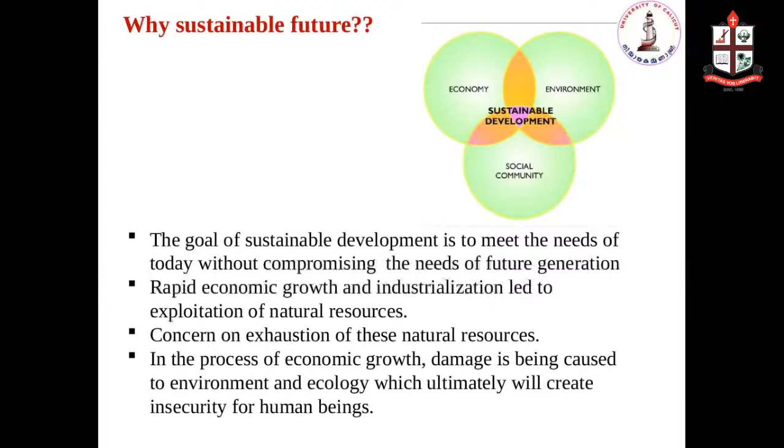Clean energy materials for sustainable future. Why? Because now everyone is thinking about very good quality materials and also energy. What we are using should be very clean and environment friendly. You know that the development of any country and any society mainly depends upon what type of energy materials they are using, how they utilize that energy, how these energies are produced, and whether it is clean and good for the society and environment.

At the same time, pollution-free energy production is very much important to keep our earth clean, and that is the main thing everyone is discussing now, because after the Kyoto Protocol, people are thinking about how to use clean energy and how to make our future very green and clean.

So why sustainable future? You know that economy, environment, and social community are the three pillars of development. For sustainable development, these should move hand in hand. The goal of sustainable development is to meet the needs of today without compromising the needs of future generations. This is very fundamental, because not only physics people, chemistry people or environmentalists, this is now the aim of all researchers working in the field of energy as well as technology. We know that rapid economic growth and industrialization lead to the exploitation of natural resources.

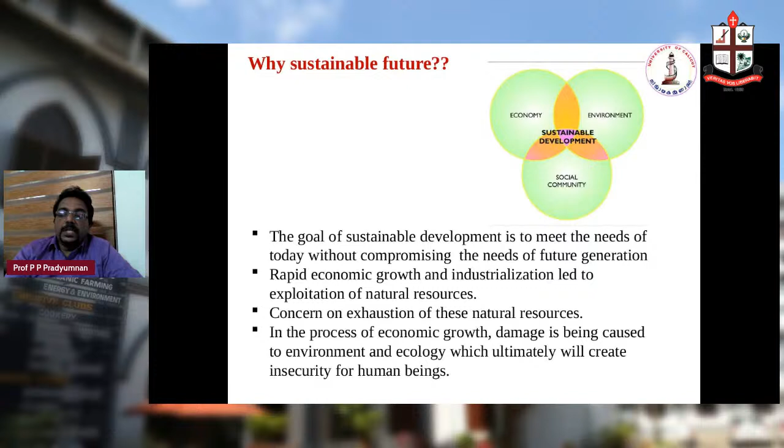This is the main thing people are now discussing: how to reduce fossil fuel usage, how to reduce the digging of oil, and whether we can use other things to meet our energy needs. As I already discussed, development mainly depends on the energy consumption of a country, how much energy per year and per head a country is using. Based on that we can calculate the growth rate of that country.

So when we look into our country, what type of consumption is there? Petroleum, natural gas, coal, electricity, non-conventional. India is still using about 48 percent of energy mainly from coal. We have very good coal quarries in the northeast and northern part of India, so we are getting enough coal. Natural gas we are getting in some areas, nearly 7 percent we are utilizing.

The next 26 percent is mainly based on petroleum and petroleum products, mainly automobiles as well as certain diesel power plants. Then natural gas, coal, then pure electricity, mainly hydrothermal electricity. And non-conventional is about 14 percent now in India, according to the 2020 survey report.

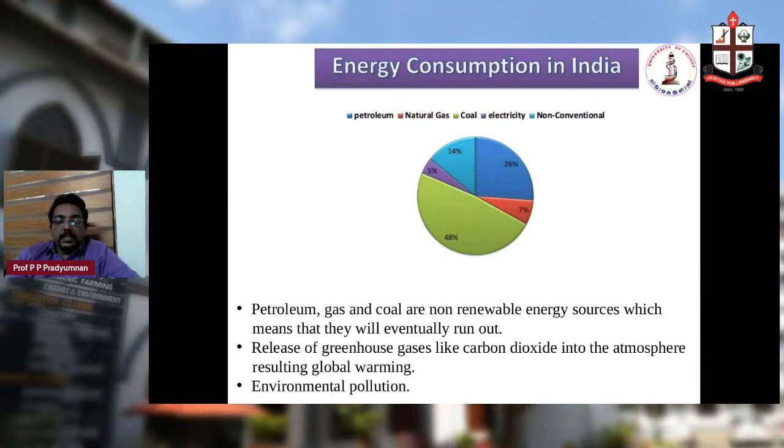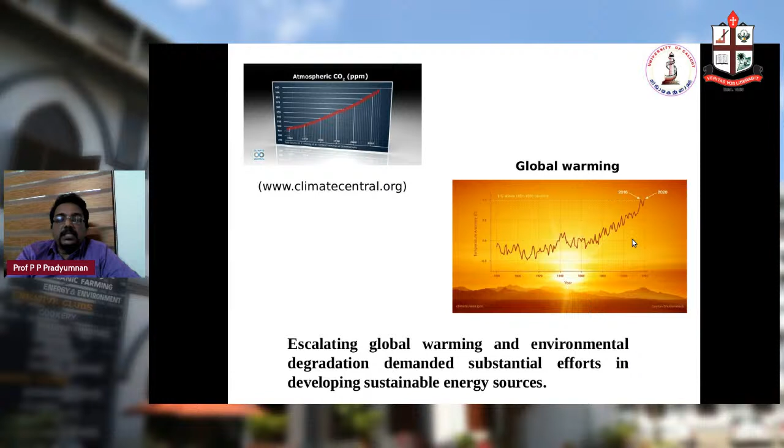Okay. So what are the energy sources we can utilize for the development of a country and for our utility? So we know that there are many conventional methods, non-conventional methods, or non-renewable energy and renewable energy classification. So in this non-renewable energy, we already discussed oil, coal, nuclear and natural gas. These are the non-renewable class of energy production.

At the same time, renewable energy, there are many, but we know that an enormous amount of heat energy is liberating from industries, automobile engines, and many other places. And even on very sunny days, we are getting enough heat energy. But all these energies are wasted because we are not utilizing them for our purpose. Of course, we are using sunlight for drying meat and fish, etc. That, in former years and ancient times itself, people were using.

But for the production of energy like electrical energy, we are not utilizing this heat energy, and only a very small amount of sunlight we are using for solar cell applications. And wind energy, because in a country like ours and many European countries, they are getting enough wind energy, because this wind must be at a particular speed, then only we can utilize it for energy applications.

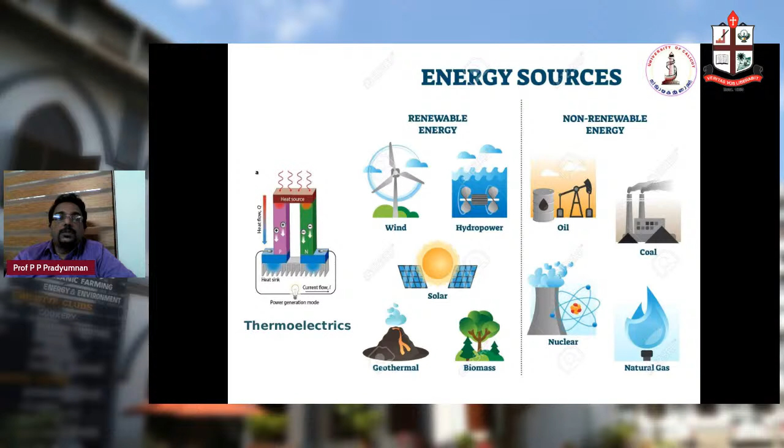Okay. So then geothermal. In some areas we know that very hot water is coming out, very hot springs. So that also we can utilize, because hot water means energy. So that is another method. And of course biomass, because an enormous amount of biomass is available on earth, we can use it for energy production. So these are the main two: renewable and non-renewable energy classes that can be utilized to meet our energy usage.

So why are people now mainly concentrating on solar energy? Because solar energy is the main component we can exploit very easily for our electrical energy applications. So the energy is incredible. One calculation says that 30 days of sunshine striking the earth have an energy equivalent to the total of the planet's fossil fuels, both used and unused. Such an enormous amount of energy we are getting day by day, but most of it is underutilized or unutilized.

The main advantage of using solar energy is that it is distributed over a wide geographical area. And developing regions like ours, India, have access to electricity generation at a stable cost for the long-term future. That is another advantage for us because we have very hilly areas, and in those areas, like the northeast, small solar plants can be utilized. People are doing that now, but with more such plants, we can reduce the usage of fossil fuels.

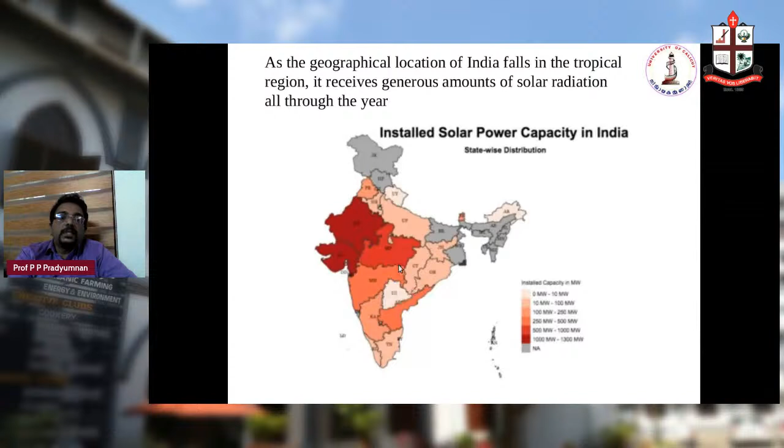Maharashtra also they are doing, but these around 1,000 megawatt to 1,300 megawatt power stations are mainly in Rajasthan and Gujarat, and very low in certain regions like Telangana. They are not at all using the solar plants now also. So we have to do more in that area to reduce the usage of fossil fuels.

So I think this is an interdisciplinary talk, so I am not concentrating much on physics, but anyway, I will give something about what we are doing in our university, some research work, at the end. But here also I am discussing some physics, but not in a deep or research manner.

So you know that solar cells are anywhere, on rooftops or where a solar plant is there. You can see in Kerala, our Nedumbassery airport is completely energized by solar plants. They are saying that the total amount of electricity they are utilizing is from that plant only, and the excess amount they are selling. So what is the main physics I'm discussing here.

You know that a solar cell is mainly now also manufactured using crystalline silicon. Production of crystalline silicon itself is a very big task, and pure silicon is used by doping P and N, because a solar cell is a diode structure material, P-type and N-type semiconductors together. So that is a diode actually.

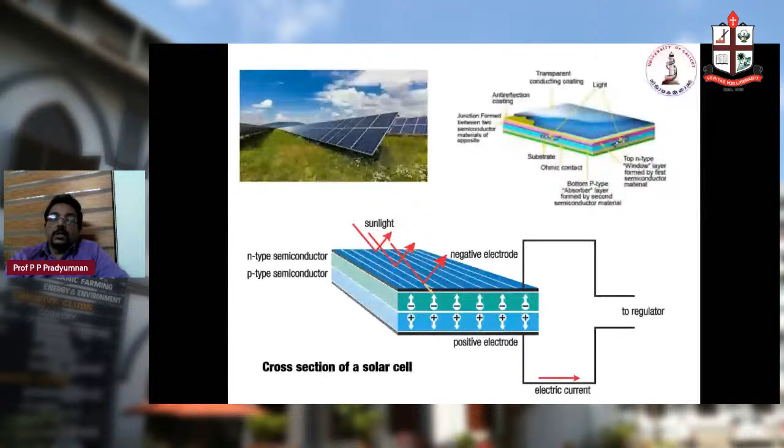When sunlight is incident, of course electrons will pass through. These electrons we can take from the bottom and the top. Then you are getting the electric current, in a simple way, and with that we can charge a battery or another cell, or directly use it for an application. So this type of energy generation we commonly call an eco-friendly method, because here no chemical reaction is happening.

Only physical things are happening, because when photons are incident and have a sufficient amount of energy, only then will these electrons be generated. Otherwise, the material will be heated up. The electrons carry, and that electron flow we are using is actually electricity, current. So initially we discussed only one type of solar cell, that is the silicon solar cell. Even now the main economy of solar cells is from silicon solar cells.

So there is a classification of photovoltaic solar cells, because initially the photovoltaic cell was the monocrystalline solar cell. I already discussed silicon preparation, crystalline silicon, how to grow the crystal, in the 1950s actually. Before that, with the invention of transistors, people needed very pure semiconductors. Then Czochralski came and put forward a method to prepare very pure silicon crystals. His method is named the Czochralski pulling method for fabricating silicon crystals.

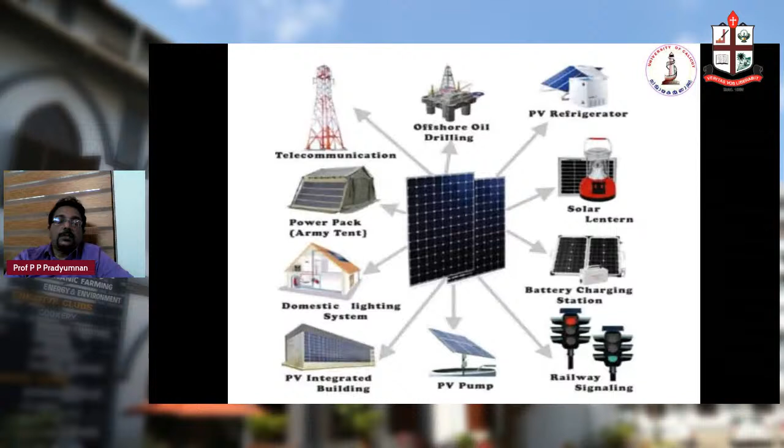For electricity generation, photovoltaic integrated buildings are there in many buildings in China. They already use photovoltaic integrated buildings to reduce the energy crisis. Then domestic lighting systems. In certain houses, while building itself, the roofs are made of solar cells, and in that way they can reduce the energy usage of that house.

Another thing is wind energy. Wind energy we can also call clean energy. But how can we say it relates to materials? Because in wind energy we are using a turbine. When this turbine rotates by wind power, that is mechanical rotation. By using certain gearboxes, we can control or enhance the speed of the turbine or generator, and that is the simple technique used here.

Similar to a hydrothermal project, where we use motors or generators, here turbines are used. The turbine will rotate, and by using proper gearboxes we can reduce or increase the speed. That high speed rotation, when Faraday's law is applied with proper generators, will give you the power output. That power output you can use for applications. That is the thing here.

Wind energy utility is very simple and at the same time very cost effective. In these very huge plants, using wind turbines, kinetic energy of wind is converted to mechanical energy or electrical energy that can be harnessed for practical usage. And it requires less space than average power stations.

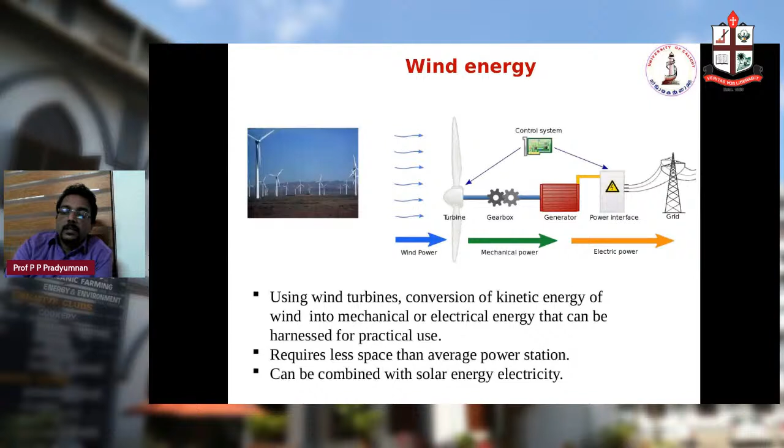And we can combine. Now people are saying that wind energy and solar energy combination we can do in certain regions, because in the night time very good wind flow will be there, and in the daytime very good sunlight is available. So the same region we can use for both. So that type of plants people are now discussing for how to reduce carbon dioxide greenhouse emission.

So another thing for generation of clean energy, of course not a new thing, is batteries. So everyone is now discussing about batteries. Now lithium ion battery, everybody is discussing. So polymer battery. Mainly after the invention of mobiles and laptops, where we need a huge amount of this energy,

mainly storing electrical energy. But before that, we could directly plug in and use electrical energy. But when we want to transport our knowledge from one place to another, the simple technique is mobiles and laptops. So there we need the storage of electricity. That is why very small and thin batteries are required. So it is definitely a transducer which converts chemical energy to electrical energy and vice versa.

But charging and discharging is the main thing when lithium ion is discussed. But now also you know that cars and vehicles, automobiles are run by battery. That is why research in this area is now spending a lot of money on how to increase the capacity of batteries and the life of chargeable batteries.

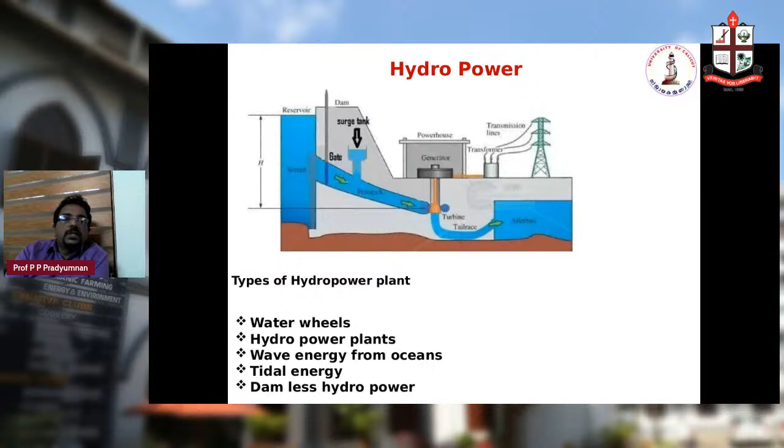Are there along this? We all are associated with water, and tides means tide itself a power, ocean. That is also another method, and there is also some research going on, but it is not 100%. This tidal energy utility is not 100% successful, but in some European countries they are successful in that area. But in India, we are not using it; some power plants we studied, but it is not working now.

Geothermal energy is a type of renewable energy taken from the Earth's core. Geothermal reservoirs can be suspected where we find geysers, boiling mud pots, volcanoes, hot springs, etc., which are giving a good amount of heat energy. That heat energy we can use for heating water, and that water we are using for tapping energy or generating power by using that steam. Water means here hot water turns to steam.

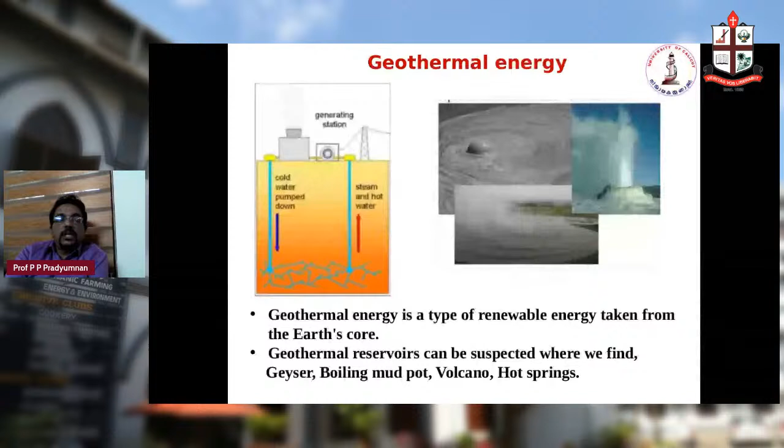Now when we discuss another clean energy source, we know that almost all automobile engines as well as industry etc. are expelling an enormous amount of heat energy, and can that heat energy directly be used for generating electricity? That question arises, and then people think about thermoelectricity and thermoelectric applications. So a sustainable and green energy environment through waste heat recovery is another thing, scavenging this waste heat into useful electrical energy.

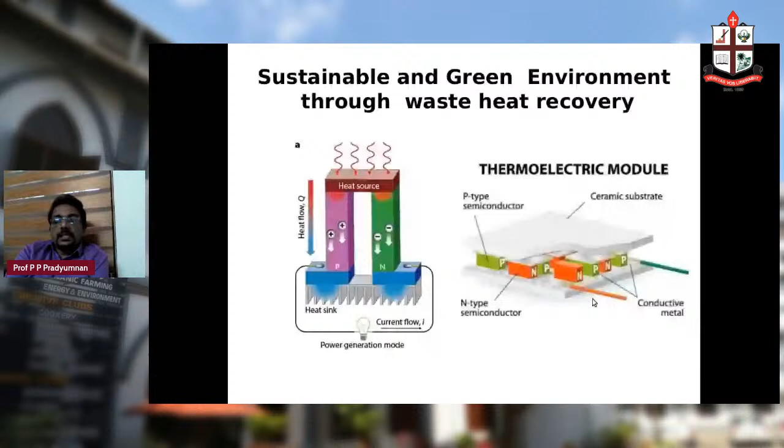Here, heat energy, by using proper PN material junctions, we cannot say PN junction, PN materials properly used, we can generate electricity. That is the simple thermoelectric module. So commercially, people are now utilizing this for both purposes, generation of electricity as well as refrigeration. That is why thermoelectrics has now become very popular, and everywhere people are discussing how we can reduce the heat which is flowing out.

Because you know that when heat energy flows to our earth or our atmosphere, definitely it will generate more and more greenhouse gases. So these greenhouse gases may again increase. That is why reduction of waste heat itself is a good method or remedy to reduce greenhouse gas. Thermal power plants, nuclear power plants, automobiles, waste incinerators, factories, and natural gas systems, everywhere you can see a huge amount of energy. So when we discuss these heat engines, about 66 percent of energy loss is in the form of waste heat.

After running a car about 1 kilometer, you just touch the bonnet of the car. Definitely, you can feel how much heat is there. So only 34 percent of the energy we are utilizing, in between 30 to 40 percent. About 60 percent is underutilized or unutilized.

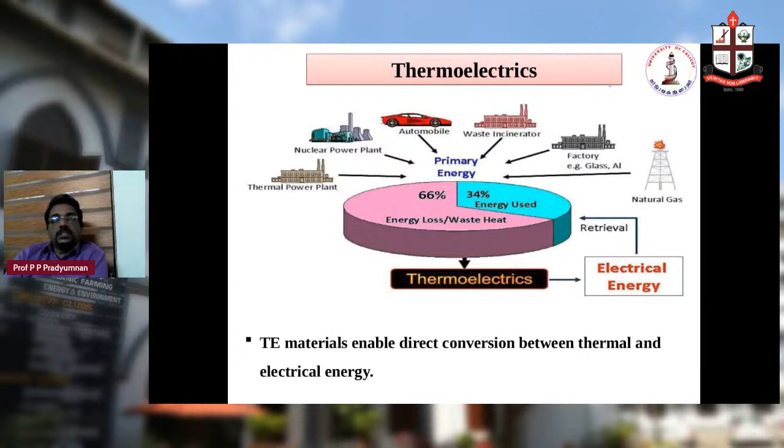Here, we need new materials like solar cell. Of course, solar cell efficiency is now reaching 20-25 maximum, but people are saying that up to 40 it is possible. But here we can't think about the efficiency further, because efficiency is not at all a problem here, because we are scavenging waste heat.

So the fundamental physics in this particular methodology of electric energy tapping is the Seebeck effect. The Seebeck effect is the development of an electromotive force or voltage across the material in response to the imposition of a temperature differential. If a temperature gradient is there, correspondingly a voltage will be generated.

And at the same time, Peltier formulated that a temperature differential is caused at the junctions of dissimilar conductors with the passing of current. Means in that method we can generate low temperature at a particular point. So that is also possible, the vice versa of the Seebeck effect. One is when a temperature gradient is there, correspondingly a potential is created. Similarly, here by passing current, there may be a temperature differential.

Then another person, Thomson, formulated the rate of reversible heat due to the passage of current along a single conductor placed at a temperature difference. So that also we are using here. So this is the simple physics behind the three effects: Seebeck effect, Peltier effect, and Thomson effect. These three are utilized in practical devices to generate electricity.

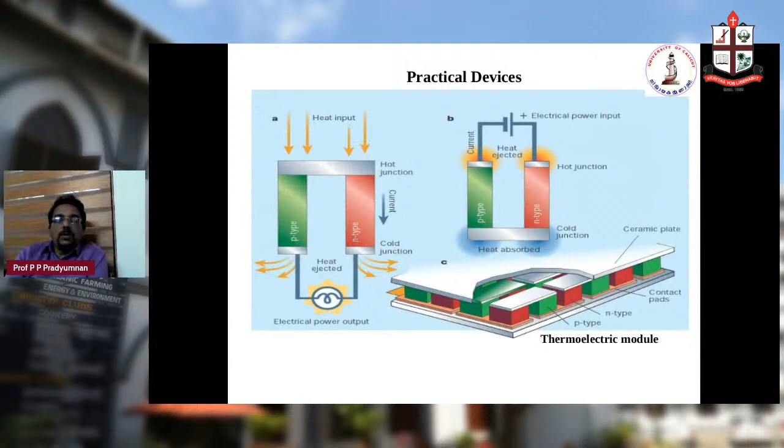That is why a very good amount of research work is recently going on, because this is not a new but a very old technique. But over the years, about 60 to 70 years, the research in the area was not that much, and now again people are thinking about how we can tap the heat energy from automobiles and other places. So the advantage of this particular technique is it actually recycles waste heat energy. So that is why it is also coming under

non-conventional energy sources. And another advantage is no moving element in these kinds of materials. No working fluid or gases are required. And there is no noise at all, because when a turbine works, definitely a huge amount of noise will be there. Even in wind plant regions, you can see huge noise pollution. But here it is proper semiconductor P and N like a solar cell. There is noiseless operation here.

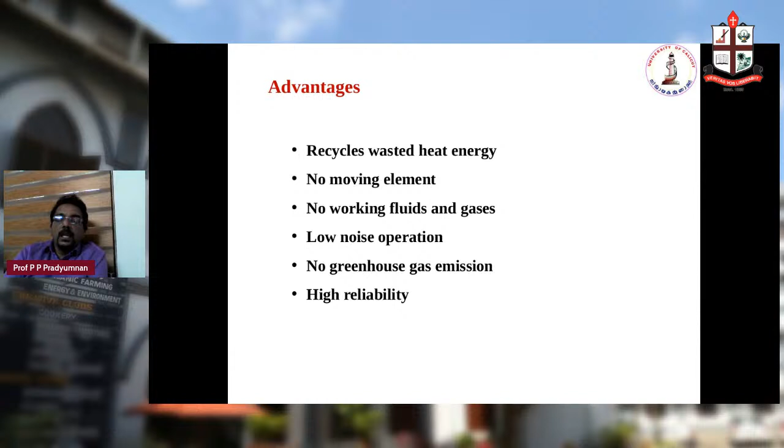No greenhouse gas emission because here heat energy itself we are using. So greenhouse gas emission will be reduced. And reliability-wise, it is also good because if a proper semiconductor we are using, then definitely the durability may be very high.

Thermoelectric applications. Application-wise, this has already started with large companies like DuPont and automobile makers like BMW. They are searching, and they used some small Peltier modules in their cars for generating low temperature inside the car. And in biological specimen keeping places, Peltier cooling methods are used. And in many food storages also, people are using prepared Peltier modules.

And of course, in extraterrestrial or interplanetary travel, solar cells cannot be used for energy generation. There, radioisotope thermal generators are used for generating electricity. So that is another main application of thermoelectricity now, interplanetary or intergalaxy in future maybe. There also radioisotope thermal generators have to be used.

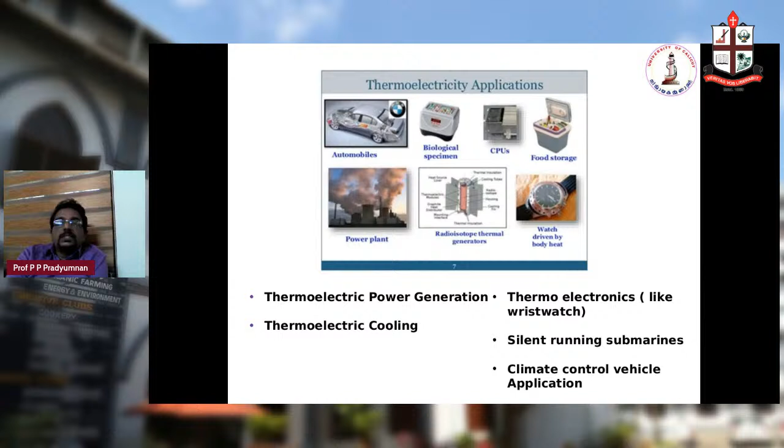That is the technique. By using proper thermoelectric generators, one can store that temperature gradient and the electricity generated due to the temperature gradient. So thermoelectric power generation, thermoelectronics we use in wristwatches, thermoelectric cooling we are using for food storage because of remote travel, etc., where there may not be any electrical energy. Silent running submarines are already there using thermoelectric generators. And climate control vehicle applications also use these type of things.

So I already discussed thermoelectrics used as radioisotope thermoelectric generators for aerospace missions. In aerospace missions, plutonium-238, a radioactive material, is kept at the center, and you can see that there are so many thermoelectric modules. When it emits radiation, that radiation may be absorbed or used by this particular unit, thin film material, and converted into electricity. That electricity we can tap by using proper circuits. That is the method used for radioisotope thermoelectric generators.

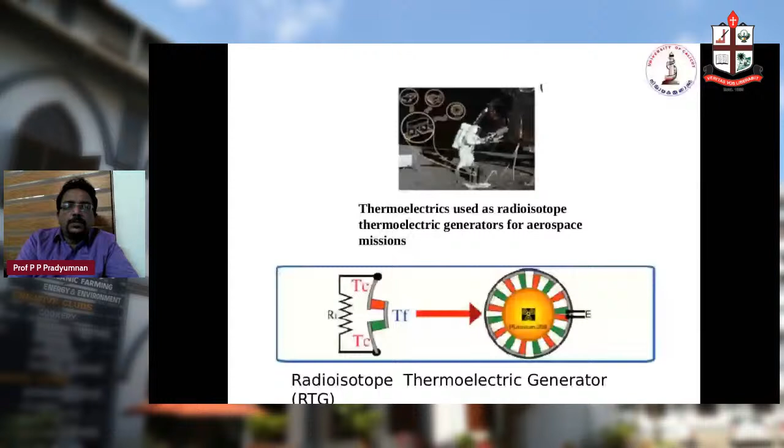This is not commonly used in our common satellites. It is for interplanetary missions like Voyager that these type of sources are used. Our common satellites use only solar panels. And in cars, of course, some works have already been started by people, and there are also thermoelectric generators.

Now another thermoelectric application: people are discussing flexible and wearable thermoelectric modules. Why are these materials becoming important? If we have any biological disease or problem, the temperature in that region may drastically change. When we place a thermoelectric film in that region, you can see generation of thermoelectricity when a gradient is there. So by pressing these films on the body part where this temperature anomaly is happening and measuring the voltages, one can say if there is any chance of cancer cells or other anomalies.

Now people are sensing. I think in one recent article people discussed certain types of thermoelectric bras used for finding cancer, etc. Okay. So wearable thermoelectric modules are another application people are discussing.

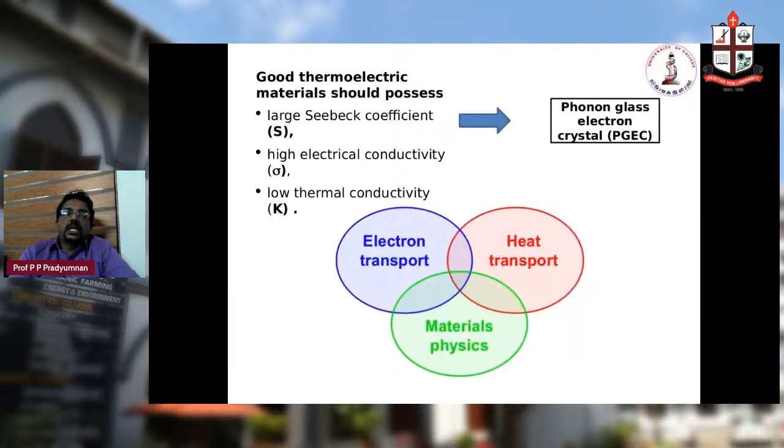But here we know we need a high electrical conductivity and low thermal conductivity. That is the main difficulty of this material. So here, electron transport and heat transport, material physics together works for getting a good thermoelectric material.

And these are the materials commonly used for these thermoelectric applications. Their efficiency may be up to 17. People are saying that 17 or 18 they can get. The common material is lead telluride. Initially people used bismuth telluride. Again, commercially the maximum utilized one is bismuth telluride.

Then silicon germanium, skutterudites, clathrates, half-Heusler alloys. These are certain classes of material. I am not going into the details of these. Then now graphene, because people are saying the material of the 21st century is graphene. So everybody is discussing graphene, and now I think in Kerala there will be a graphene institute under the digital university they started. So graphene also has played a major role in thermoelectric materials.

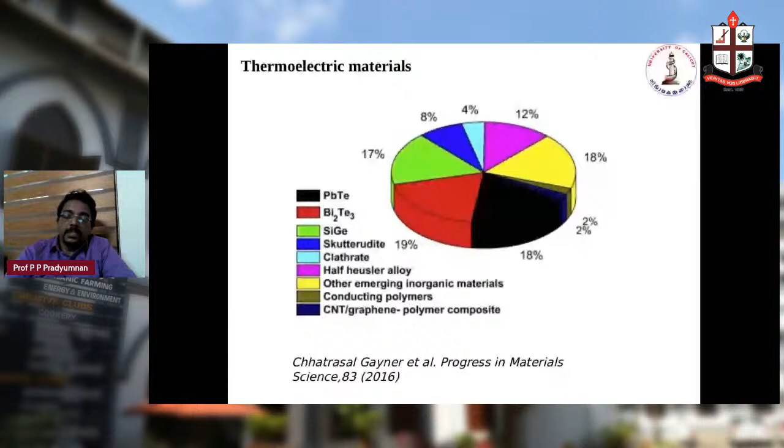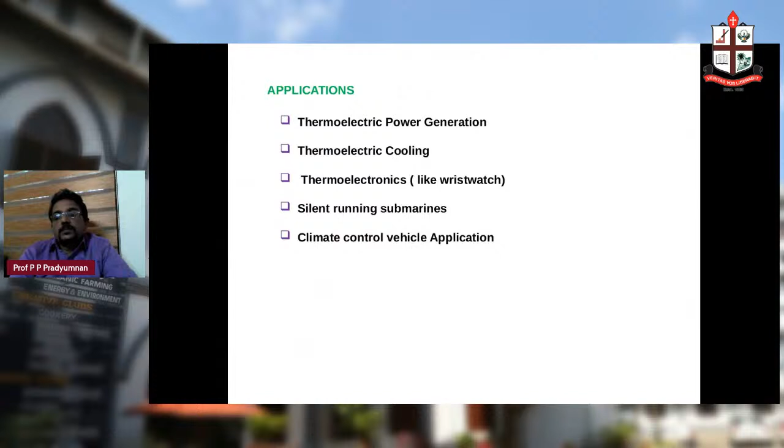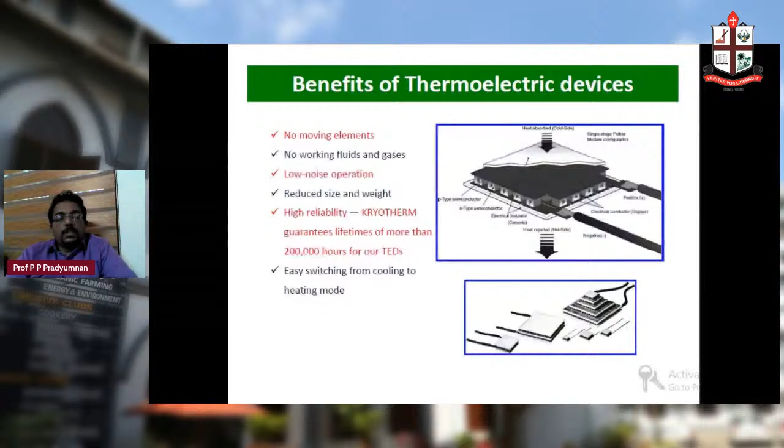So what are the benefits of these devices? I already discussed. No moving parts, no working fluid, low noise operation, and very very small size and weight. And reliability, some company like Kryotherm guarantees lifetime of more than about 2 lakh hours for their thermoelectric devices, and easy switching from cooling to heating.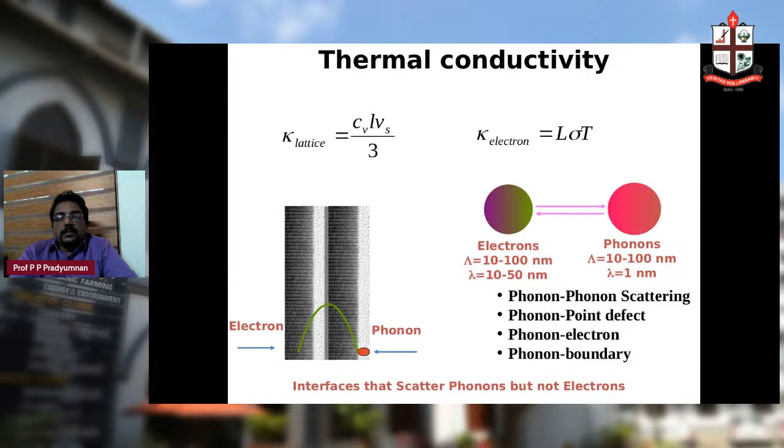And now material-wise, the figure of merit, I already showed you the ZT value. So what is the limit of the ZT value, and how can you increase the ZT value, if there is any limit? So there we discuss phonon glass electron crystal, PGEC, a class of materials. There these materials come into the picture. They are semiconductors. Semiconductors are the most suitable thermoelectric materials.

Even though metals also produce thermoelectricity, degenerate semiconductors are the most suitable thermoelectric material to get a figure of merit ZT value greater than 1, or the aim will be 4. Now people are discussing that if it is 4, the efficiency will be very high, and for commercialization and other applications 4 is good. But 1 is now reachable, and bismuth telluride-like materials show a ZT value of around 1.

S squared sigma by K. ZT is equal to S squared sigma T by K. So the thermoelectric figure of merit Z is S squared sigma by K, that is ZT is equal to S squared sigma T by K. L is the Lorentz number, that's a constant. I'm not discussing more in detail. So this is the reason: low thermal conductivity and high electrical conductivity are achievable in these semiconductors.

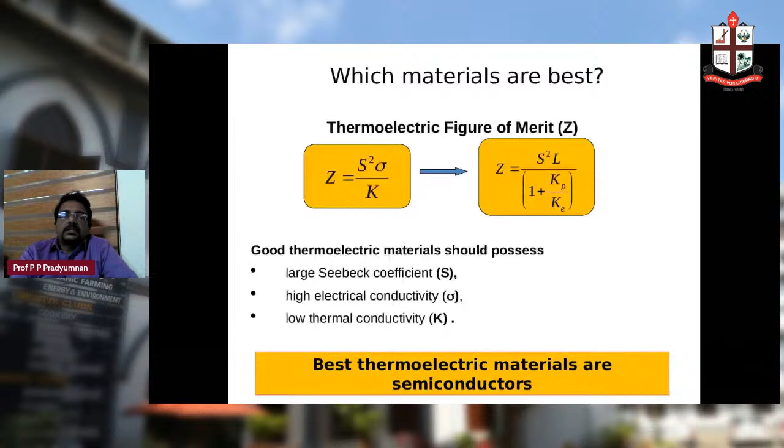So the power factor is S squared sigma. So now everybody is looking at the efficiency, and the working of a thermoelectric material depends upon the S squared sigma value of the particular material we fabricate. So these are certain materials.

Nanostructure. We already discussed how to reduce the thermal conductivity. One method to reduce the thermal conductivity is nanostructuring. In a bulk material, thermal conductivity is higher. If nanostructured, there are many scattering centers, and it will not much affect the electrical conductivity, of course it depends, but at the same time thermal conductivity may be drastically different from its bulk counterpart.

So this picture shows that using a simple candle to heat one surface of this material, the LED is glowing. This is the method of thermoelectric generation. Now people are saying that if you keep this module on a hot surface, you can generate electricity. Many such units are now made of different kinds of materials like lead telluride. Here you can see a large number of materials in this class.

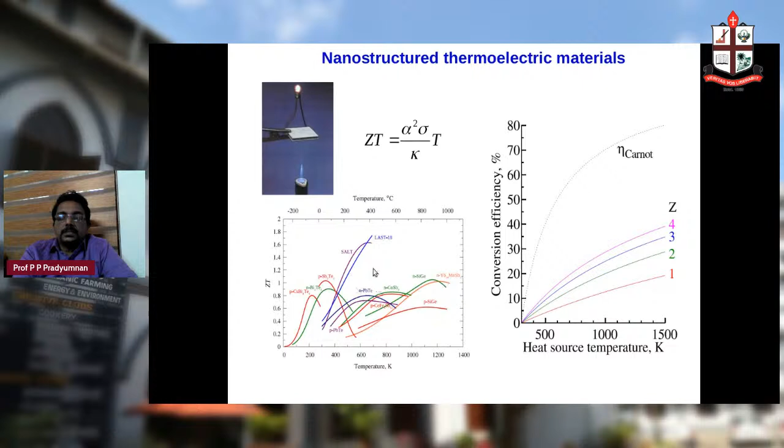So here, how to scatter more phonons? That depends upon structuring. So in our lab we did some work on bismuth telluride, antimony telluride, lead telluride, etc.

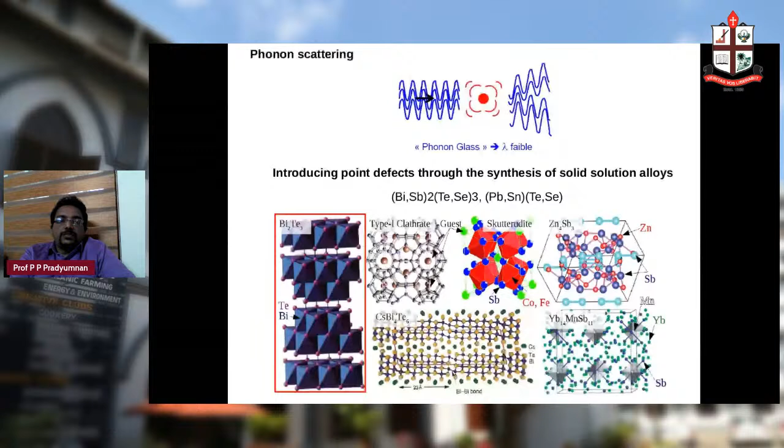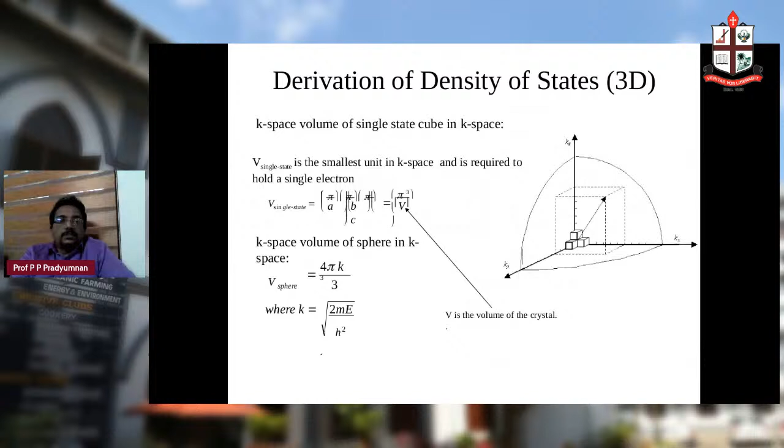There we also studied nanostructures, and we fabricated different kinds of thermoelectric devices, then cobalt, etc. So these are some thermoelectric materials, and of course there is so much physics behind it. I'm not giving all those details, but of course the density of states is a very important parameter when we discuss nanostructures and nanostructured thermoelectrics, and how they play a major role in the efficiency of this material.

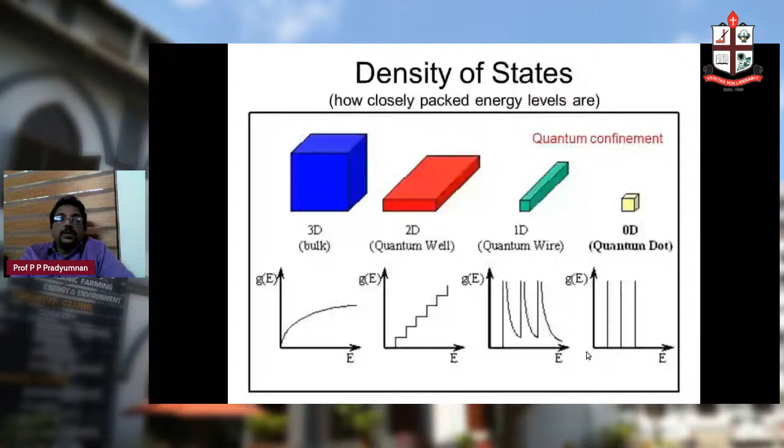So this is one of the fundamental things when we discuss nanostructured materials: how the density of states changes when the material is bulk, crystalline or three-dimensional, and two-dimensional, how the density of states varies with energy. For a quantum wire it is more precise, and for quantum dots it is again very much precise. So all these factors also matter when you are incorporating nanomaterials into thermoelectric modules.

Here we prepared tin nitride and chromium nitride materials, both bulk as well as nanostructured, and also thin film forms of chromium nitride as well as tin nitride, and studied their performances. They also show a very high power factor, nearly 400 or 350, and we published these results in the Journal of Applied Physics, and also in Materials Science and Engineering B recently.

These are some new thermoelectric materials we prepared, and we studied their thermoelectric features, Seebeck coefficient, power factor, and the temperature range. This works very nicely between 200 and 240, because this range is very much available in our automobile engines and other places. If a material shows very good thermoelectric property at less than 100 degrees, then we can utilize it for sunlight heating. That is why people are looking for materials which work below this.

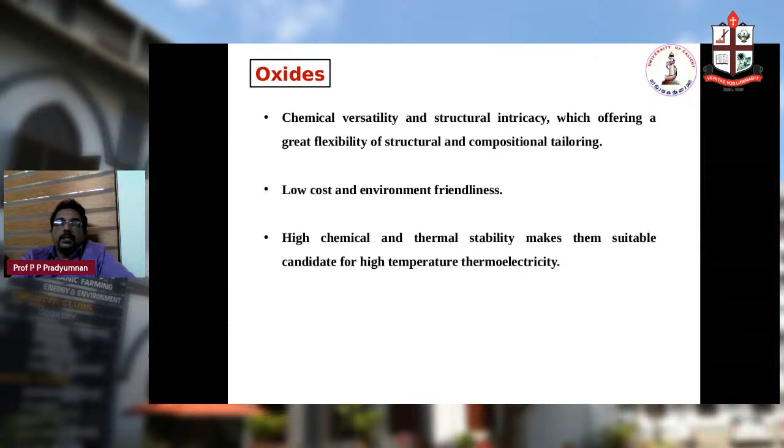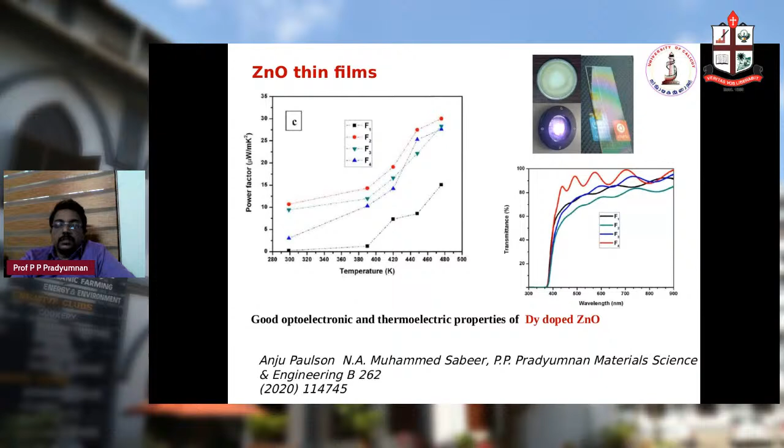So we were successful with one, but we are looking for more than that. The figure of merit value is nearly one for this class of material we have studied. So this is the work we did: oxide, nitride, and telluride. Okay, thank you for hearing my talk.

So okay, I'm done. Hello, hello. Yes. Can you? Okay. I'm stopping my sharing. Okay. If anybody has any doubt, you can ask. I think I'm audible. Any networking problem? No, no problem. Okay. Thank you, Dr.